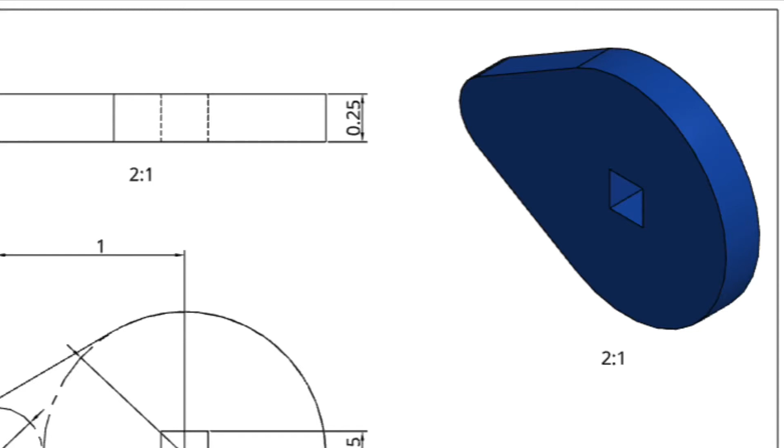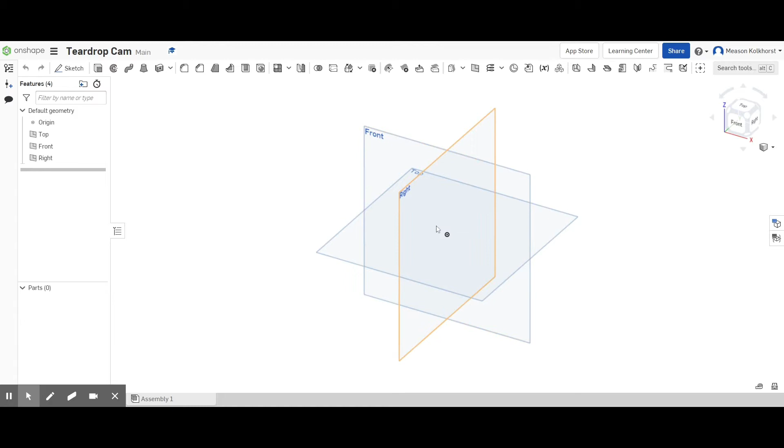Teardrop Cam, T-E-A-R-D-R-O-P. We're going to start off, and if we take a look at it, you'll notice it's basically two circles that are connected together.

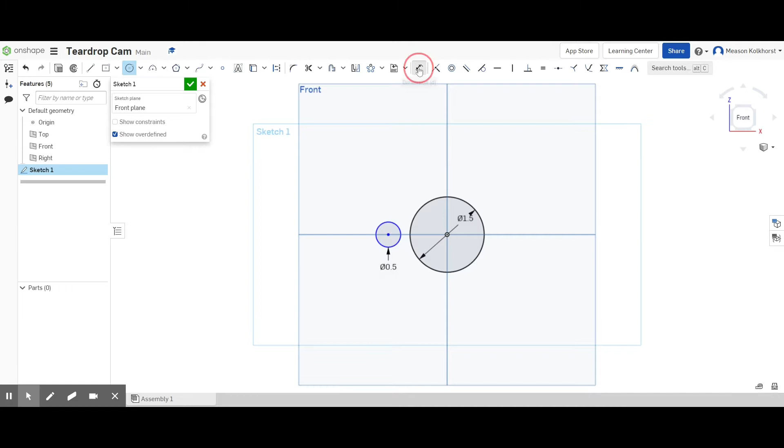We're going to start on our front view, and I'm going to start with the big circle right here in the center. It's going to be 1.5. I'm going to line up the second one right here, and its diameter is going to be 0.5. The distance between these two is going to be 1 inch.

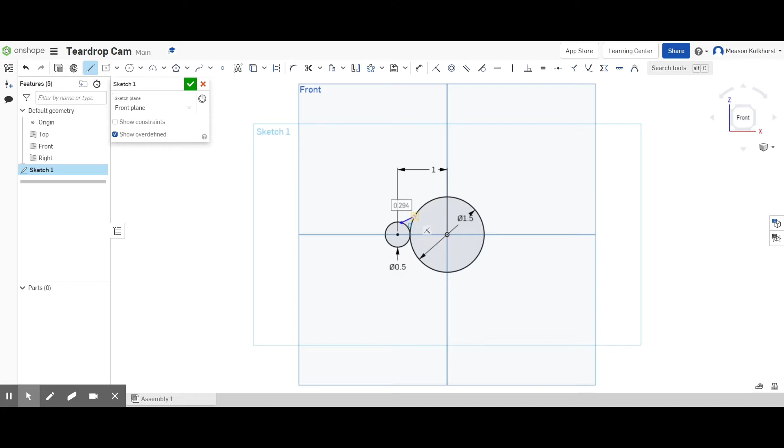So they're touching each other, turns out. And now I need to make some tangent lines. I'm going to touch this line to here, but I know it's not tangent. I'm not going to try to do that with this first one. Click, so I can turn off my line. And then I want to make sure that they're not lined up with each other.

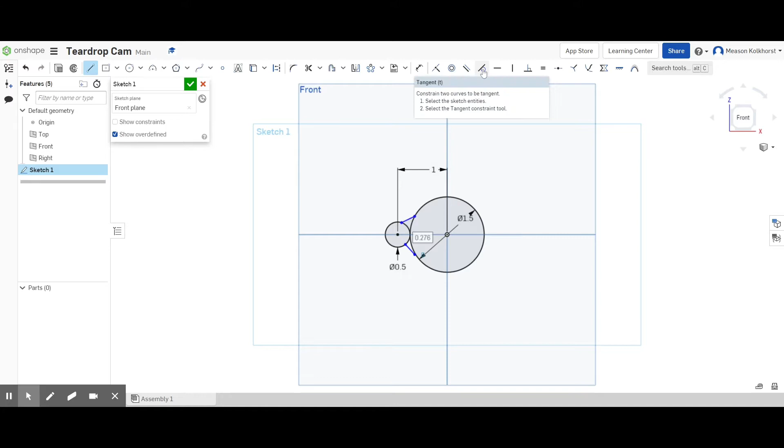I'm just going to make two random lines touching. Click a second time, turns it off. And now I'm going to come up here and choose the tangent tool. So here's my tangent tool. Oh, and it didn't touch, but that's okay.

I want this being tangent here. And since I didn't touch it, I need to make a coincident and have it touching there. Now it's tangent. Tangent is where the circle would touch a straight line if they were just bumping up against each other.

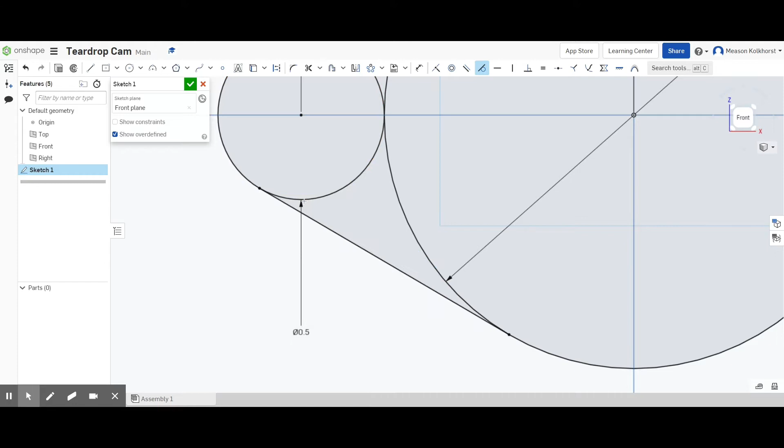So I'm going to go back and choose this one, this line being tangent with this circle. Hey, that's starting to look pretty good. Let's do the same thing here, this line tangent with this circle. And it looks like this one is already tangent, but we'll go ahead and do it anyway.

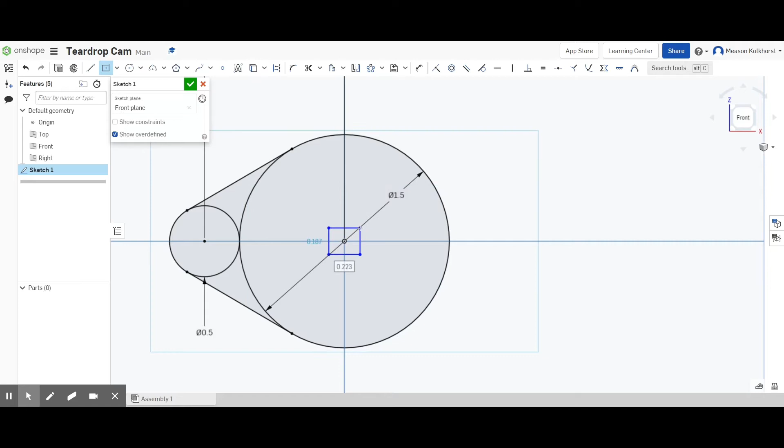All right, now we need our center. We're going to use the center point rectangle, and this is going to be where our axis goes. We're going to go right in here to the apex and draw our rectangle 0.25 by 0.25. And so it's already locked into the center. I believe that's all our dimensions for this.

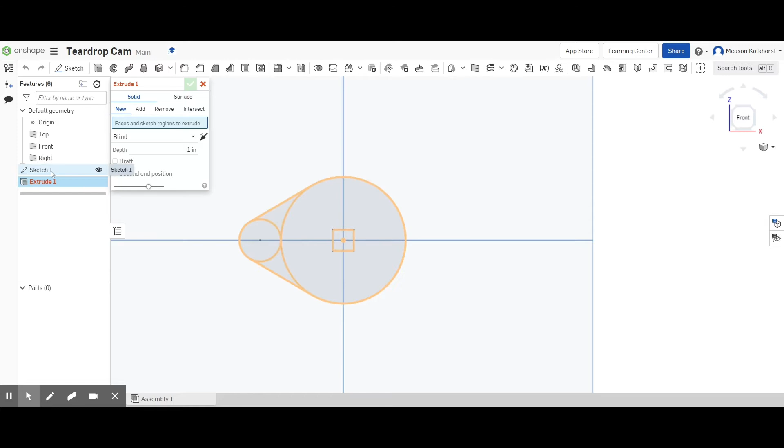Green check mark. I'm going to extrude it. I could come in here and click, click, click, click, click, click, click. Instead, I'm just going to hit sketch, and it chooses everything except for the circle and the apex, which is kind of nice. If it had accidentally chosen that piece, I could have backed out of that by coming over here and clicking the little X's.

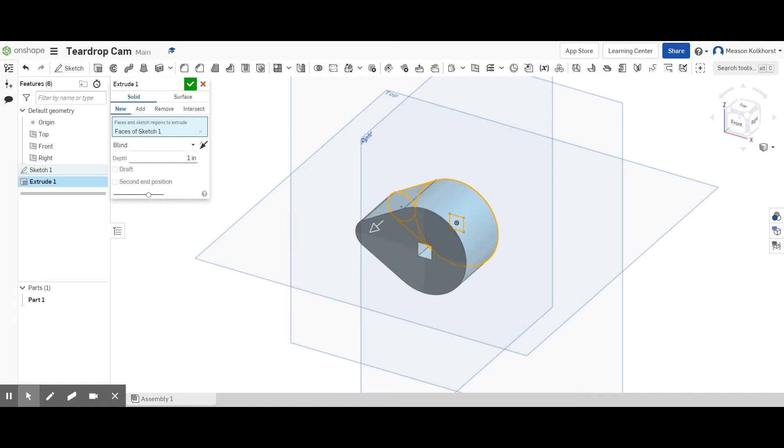So let's change it to isometric so I can see what I'm doing, and let's not make this mistake a second time. 0.25 is our depth. Green check mark.

Make sure you change your color, making the edit appearance. And I think this one I'm going to make it blue. Green check mark.

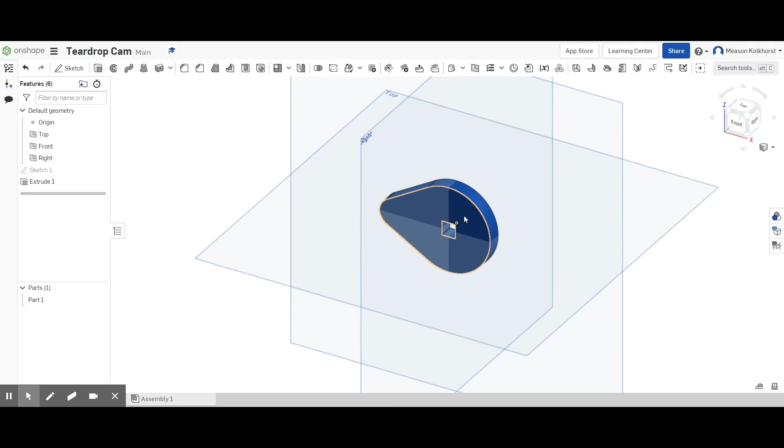Zoom in on it. Remember, when you're going to take a picture of it, I need you to open up the sketch so that I can see the dimensions. Don't have it so far away that I can't see what's going on. Zoom in on it so I can see.

That's going to be one picture that you turn in, green check mark. And this is going to be the second picture that you turn in. So you need two pictures, and that will be worth a C.

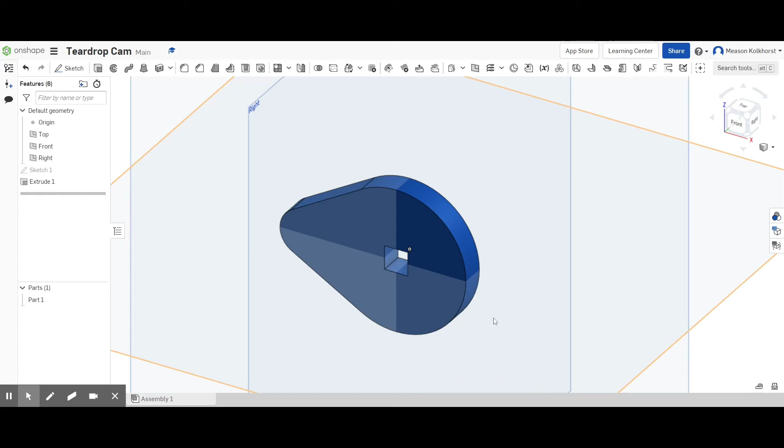Okay, so if you want something better than a C, you're going to have to create some kind of design on the front of this teardrop.

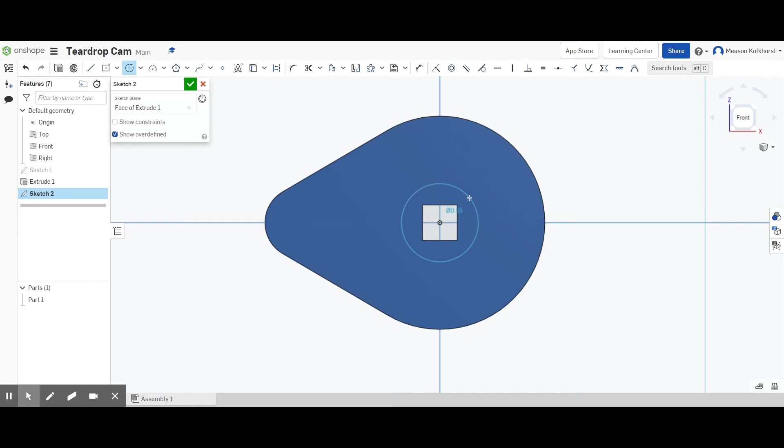I think I'm going to start with, again, a circle in the center here to give it an outline, called 0.5.

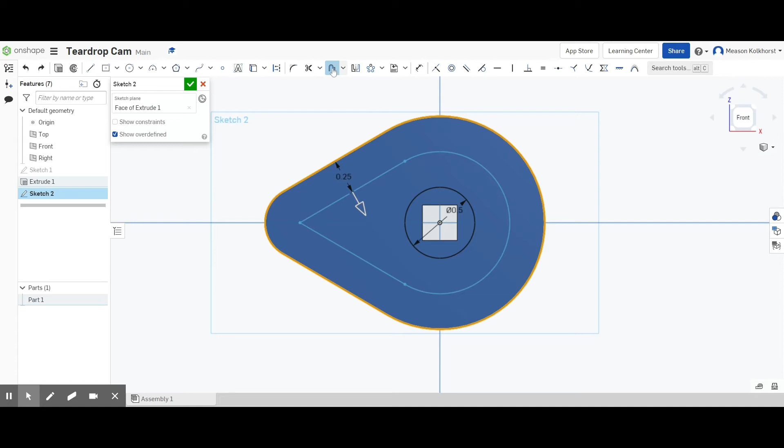I'm going to come over here and do an offset of the shape here. I don't like that it's not letting me—if I choose it, it's going to make it into a point here. I don't like that very much. Let me go ahead and turn this off. I'm going to change this to half of 0.25, which is going to be 0.125.

I believe I'm going to come over here and make a circle. I'll line it up here. I'm going to say 0.25, and I'm going to use the tangent tool and make those two tangent and those two tangent, and come back in and trim this piece and this piece. I kind of like that.

All right, now I need my pattern that I'm going to put inside the middle here. I'm going to be boring and do what I did last time. Draw me a couple lines. One line here, turn the line tool off. One line here, turn the line tool off by clicking a second time.

Let's dimension them. Same as last time, 0.2. And the distance from here to the center is going to be 0.1.

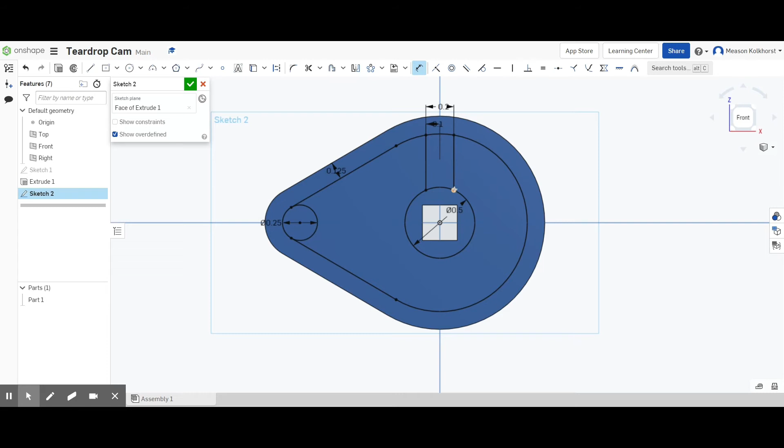Are those touching? I don't believe they are. So I'm going to make them touch. Oh, it didn't like that at all because I lined them up together.

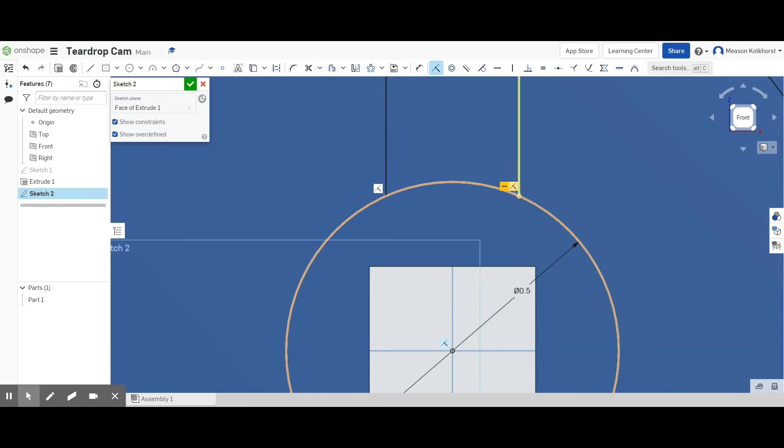Let me turn on my constraints. I know y'all have dealt with this problem before in the past. We just need to turn off, delete, backspace, and therefore everything lines up where it's supposed to be. Turn my constraints back off.

Again, this is why it's worth more points than just doing the standard shape, because you're having to create and be creative. Okay, I'm going to use my circular pattern again.

I want to pattern this guy, and you'll notice they're starting to float out here. I'm okay with that for right now. I want to be more than 3 pieces. Let's try 5 pieces.

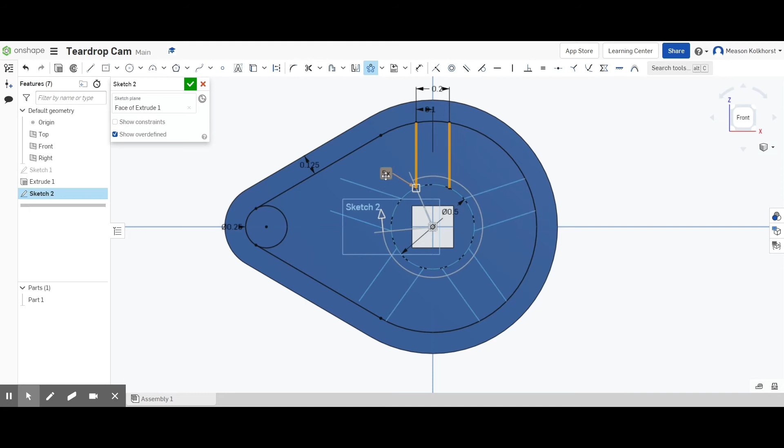Not really happy with that. How about 7 pieces? No, I think 7 is too many. Let's try 6. See what... ah, yeah, there we go.

Now I have a nice shape, looks like it might make something close to a diamond in the center here. I'm pretty pleased with that.

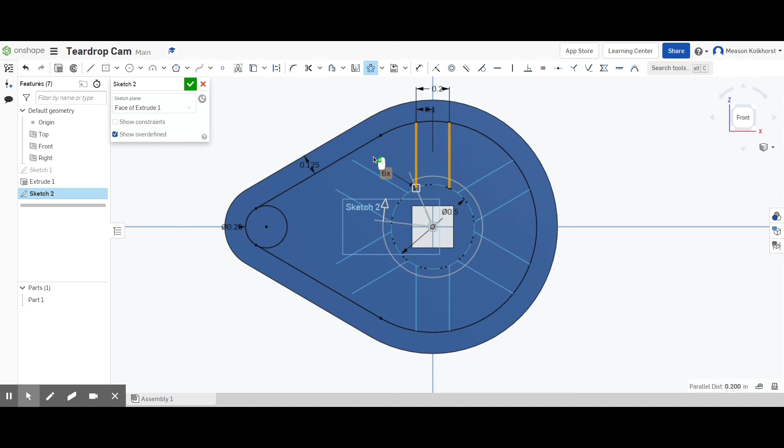I'm going to come over here and green check mark, single click, and once again, if I try to move these guys any at all, that center starts moving away, and so does everything else. So let's go ahead and constrain that center to our center point.

And we've got a disconnect somewhere. Let's see where our disconnect is. Turn on all our constraints. Doesn't like that one.

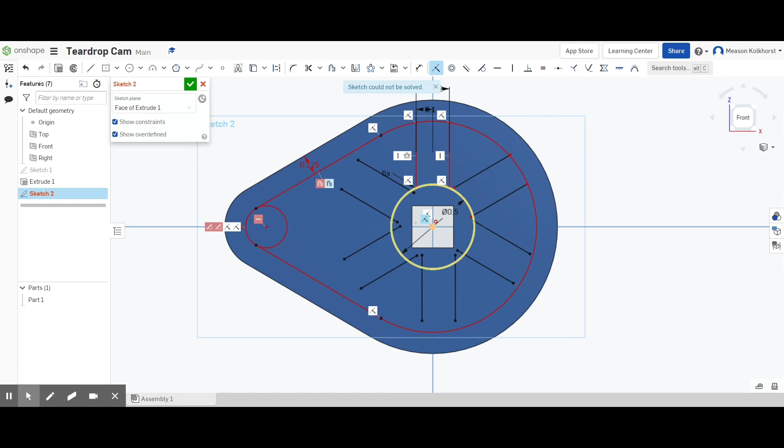If I come over here and take this and hit delete, everything lines up. This was the only one that got moved out of the way.

I can come back in and dimension it. Turn to blue, dimension between those two. It's going to be 0.125, and we're good to go. Now it's black. We're all good.

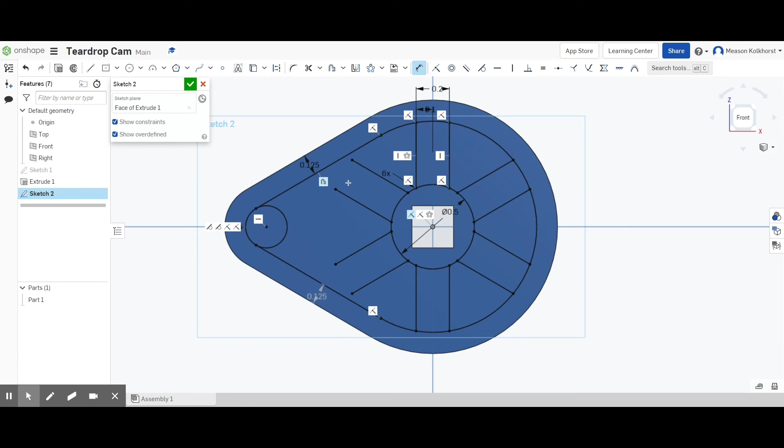Okay, turn my constraints back off. And now I want to make sure that these guys come out and touch over here.

The coincident tool is not going to work. I cannot coincide this to this because it's a copy of these other pieces and they're all equal to and can't change. So that's not going to work.

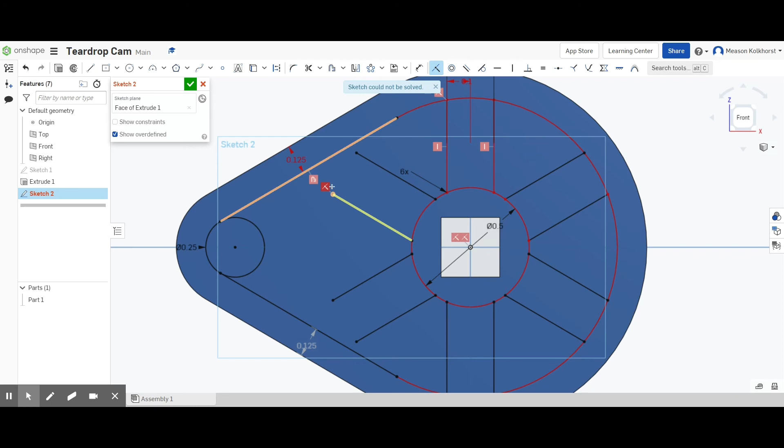Let me hit undo. So what I'm going to have to do is draw lines to make this distance work out.

Now, don't try to make them perfectly straight because things get all wonky and weird. So I'm going to make them, turn that off, make them weird, directional—see how it wants to line things up? That's not good, we don't want to do that. We want to be someplace where it's not forced into place.

Come over here, I'm going to do the same thing, point and click a second time, take this one, point, and try to find something that is not—wow, there's a bunch of places that are lined up here. There we go, click, and now they're not. Let me go ahead and turn this tool off.

Now, that looks weird. What we're going to do is make them parallel. I want this one to be parallel with this one. I want this one to be parallel with this one.

I'm going to do the same thing down here, parallel, and this one is parallel. And there they lock into place. That's how you fix those longer lines on here.

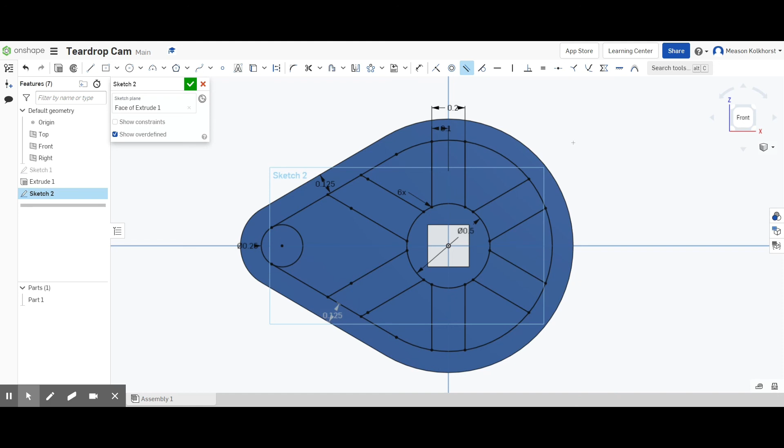Now, again, I'm pretty pleased with this. Remember, you're going to take a screenshot of this so it shows all the dimensions.

Green check mark. I'm going to come back through and extrude 1, 2, 4, 5, 6, and I think I'm going to change these to remove. See how that looks isometrically.

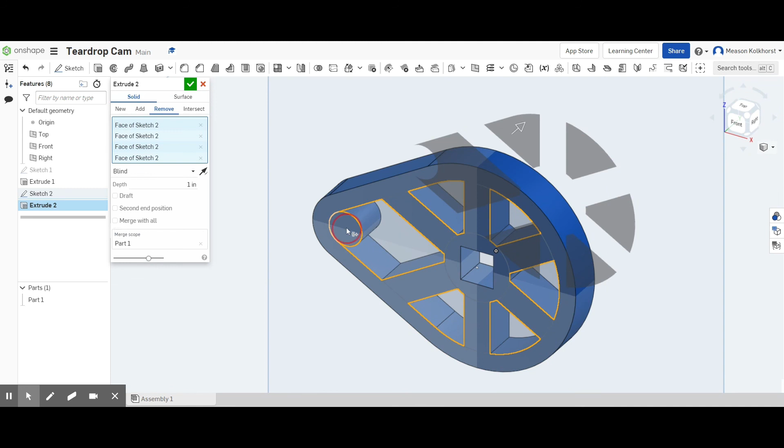And I think I am—I think I'm going to take this piece out too. Green check mark. That looks pretty good.

That looks pretty good, so take a screenshot of that also. And so you'll have 4 screenshots you need to turn in—the original 2 and these additional 2 for your better grade.